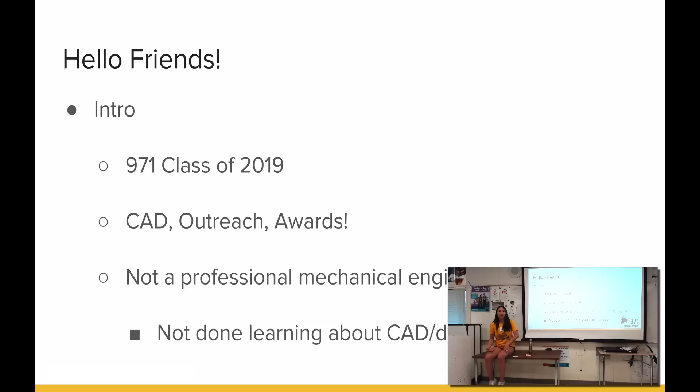I'm also never done learning about CAD and design. It's such a wide field. There's so many more things to learn about it. The software has so many things. The design, just learning design, there's so many new things you can learn. So just take me, yeah.

Okay, so the first thing we're going to talk about is what the difference is between CAD and design. I know a lot of teams kind of group those into the same thing. Your CAD lead is the same as your design lead, but they're actually quite different. So CAD is a software. What we use on our team is SolidWorks. Some of you probably use different things, like Inventor, Fusion. For today's presentation, it doesn't really matter what you use. The principle behind it is all the same.

But CAD is a tool, so it's something that you use to accomplish something, right? But when you're designing something, you're creating something for a specific purpose. You have something that you want to accomplish, and you're trying to do it. So you're building an arm to put something on the scale. You're building intakes to be able to intake a cube at X position, right? And often when you're designing, you use physics and mathematics to optimize functionality. You want to know how something is going to work when it's actually on the field.

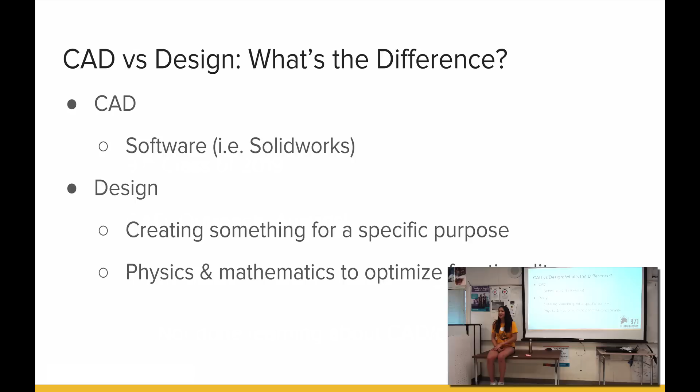So today we're going to be talking about how we use CAD software to optimize design. So how do we use the CAD software as we go through the build season to be able to optimize and increase functionality, to predict what's going to happen when we actually design a mechanism and then put it out into the field. So any questions about that?

Oh, just because I'm curious, how many of you guys use SolidWorks? Okay, that's like most. Any Inventor or Fusion? Okay, that's totally fine. You'll still understand.

Okay, so what happens on day one of build season? So you get the game. You're probably very excited. Sometimes you're probably a little scared. But what we do is we start brainstorming potential strategies. So what do we want to be able to do? Do we want to be able to place on the scale? Do we want to be able to place on the switch? What kind of mechanisms do we want to build that will accomplish them?

So we'll always come up with some goals. To maximize the amount of points that we can accomplish, what kind of strategies do we want to deploy? Like, do we want to be running defense? Do we want to be doing vault, switch, to scale? And then how are we going to build mechanisms to accomplish those goals? So are we going to build an elevator? Are we going to build a double-jointed arm? What's going to happen, right?

So then we want to know if something will work. Because you can say, oh, I'm going to build a 10-jointed arm that's in the game animation, but you don't really know if that's going to work. So the first thing you want to think about is what your design constraints are. So what are the game constraints? How big can your robot be? How tall can it be? So how are you constrained there?

And then the second one is, how is your team constrained? So what kind of resources do you have? How many people do you have working on CAD? How much experience, and how much do you know? What is your manpower, essentially?

So a good example I always make here is we build an off-season robot called the third robot, and it's always very different from the season robot because our off-season robot doesn't have any mentor involvement. It's completely student-run. So the resources and the team constraints for the third robot are very different from what we can allow for ourselves during the season, if that makes sense.

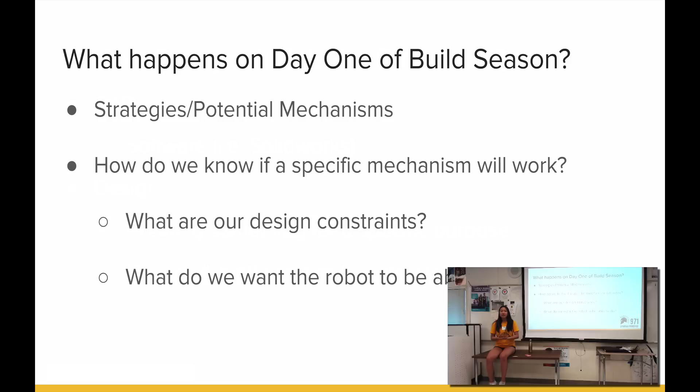And then you also want to think about, back to your original strategies, what do you want your robot to be able to do? So you have strategies. Maybe you want to be able to place on the switch and do the vault, or maybe you want to be able to do the scale and defense. So what kind of mechanisms are you going to be building? And are those going to work to accomplish that goal that you set for yourself?

Okay. So in order to accomplish those goals, you want to ask yourself some specific questions. So you probably accomplish this doing either prototyping or doing some CAD modeling, and I'll talk about those a little bit later. But you want to ask specific questions. You want to know exactly how you're going to solve your problem. You're not just prototyping just because. You're also not going to prototype your whole robot. You're prototyping specific aspects of your robot to be able to solve specific questions.

So what I have here is, how tall does the arm need to be to stack two high on a losing scale? That's a very specific question. You have a goal. You want to stack two high on a losing scale. Okay, so how are you going to do that? Where are you going to put your wheels on your intake so the cube doesn't get stuck?

So if you attended our overview, you would know that one of our main goals was to be able to intake the cube in whatever position. So how are we going to build a mechanism that accomplishes that? And then what kind of material would grab the cube well? So we were testing a bunch of different materials to grab the cube. So how are we going to do that too?

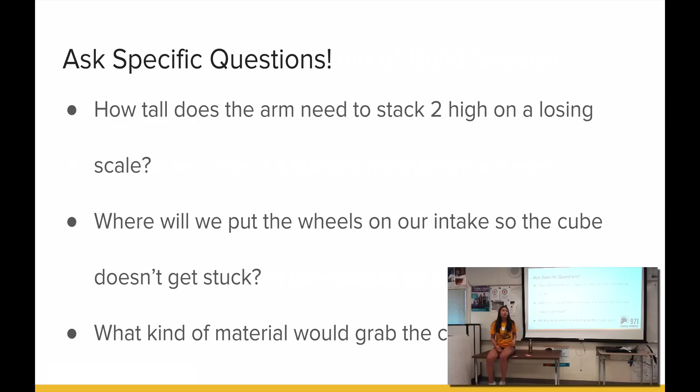Okay, so then how are we going to answer these questions, right? You have questions. You don't know how you're going to build an arm. You don't know how tall it's going to be. You don't know what your intake's going to look like, right? So now you want to start solving these questions. So there's two different ways that you can start. Week 1 of build season, you have to go really broad. You don't really know what your robot's going to look like. You kind of know what you want.

So then prototyping is more like real life situations. There's things that happen on the field that you can't really account for in CAD. So like the carpet, that one's always a big one. You can't model a carpet in CAD. You can't model the friction that the cube has across the carpet. So you always want to be prototyping something that allows you to address those issues. So this is kind of like what happens in real life.

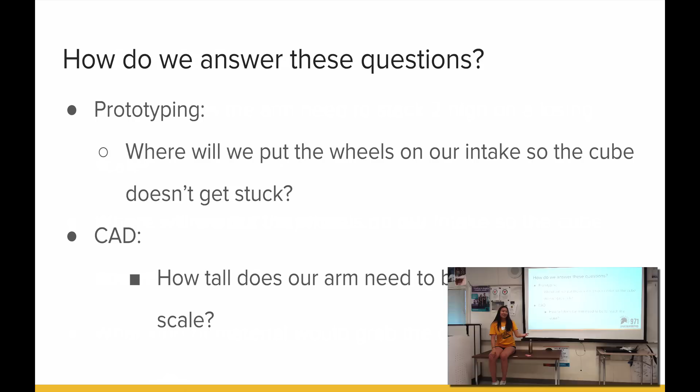You're trying to simulate what's going to happen on the field, but then you also have questions that you can answer in CAD. So, for example, how tall does our arm need to be? You don't need to build an arm prototype to answer that question. You can model that in, and then model the different segments. And I'll talk a little bit more about how we do this next.

Okay, so to answer those questions that we can solve in CAD, we do something called Crayola CAD. It's called Crayola CAD because you can liken it to drawing with crayons. When you're drawing with crayons, it's not exactly the most specific thing. You don't exactly know how big that part is going to be, but you can approximate. And you only have what you care about.

So it's big blocks, it's sketches and representations, and like I said, you're trying to solve a specific question. You're trying to find an answer to something. So this would be how long is my arm going to be? So maybe you have one segment for the distal, one length of the arm, and then you have another segment for another length of the arm, and okay, is that tall enough, right?

You are trying to understand the pros and cons of different designs. So is this feasible? Is this going to be possible? Can we do it with the resources that we have? How is this mechanism going to interact with the rest of the robot?

So where are my intakes going to go? Where are my arms going to go? Is it all going to fit together? Am I going to be able to package this right? And then you also want to think about what necessary components will I need. So then, am I going to be able to accomplish this with the components that are available to me?

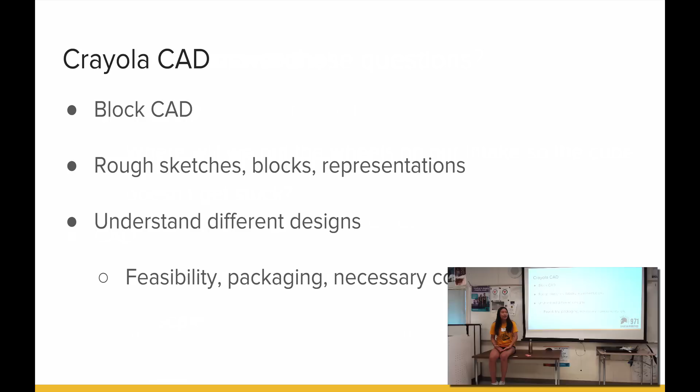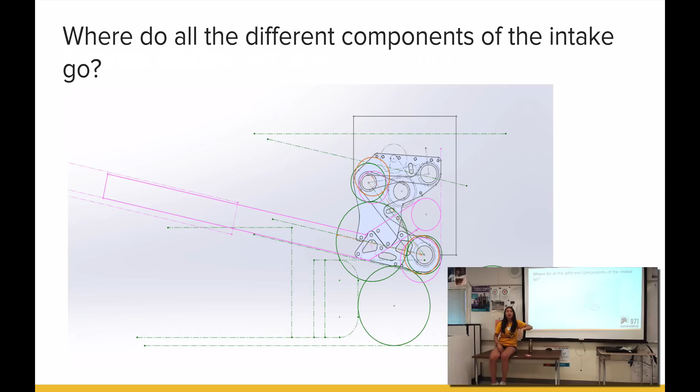So the pink line right here, that's the actual intake. So that's the part that comes out. And then the green ones, those are the balls. So it models the path of the balls as it flows into the robot. And then up there you can see all the belts and the pulleys that we had to model in because we wanted to know if it would fit together, if everything was going to work.

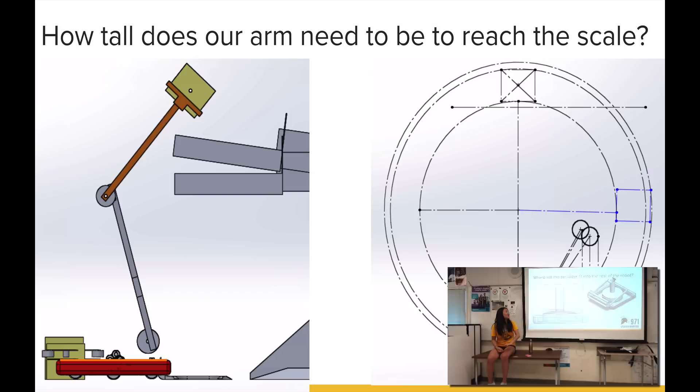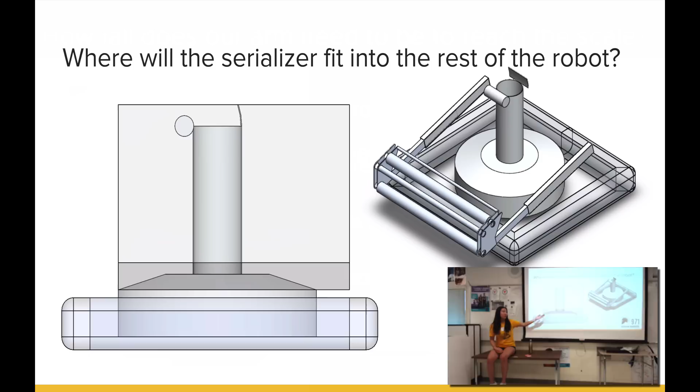Okay, great. So maybe by now you're in week 1, week 2 of build season. You know kind of what mechanisms you want. You know how they kind of fit in with the whole robot. You kind of have their basic constraints in. So okay, what's next, right?

You go back. Questions? And I'm going to go into more specific examples later.

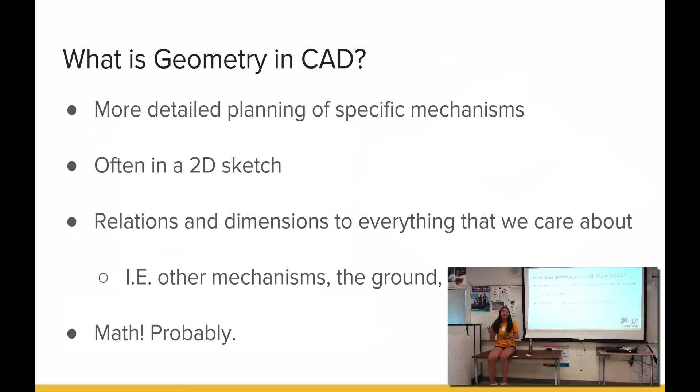And then with Crayola CAD, you say, oh, if we stick the serializer in the middle of the robot, where is all our other stuff going to go? Like, if we put a transmission right there, is it going to fit? Is the serializer going to run into it? Is that going to work? And then with geometry, you're solving the more specific hows of a mechanism. You're solving if it's going to, well, let's go to the next.

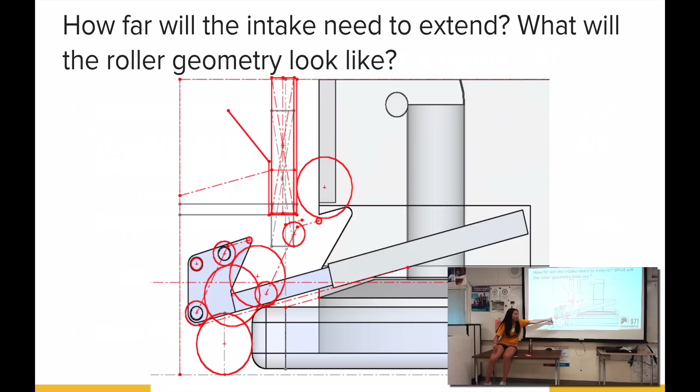So with gears, do you know how to calculate gear diameters? There's tables, and that's always what I've used. Okay, well there's actually a way that you can do it. Most of the gears that you buy on VexPro have 20 DP. DP stands for diametral pitch. So for every 20 teeth on a gear, you have 1 inch diameter. And then on a gear, you have something called pitch diameter, outer diameter, and inner diameter.

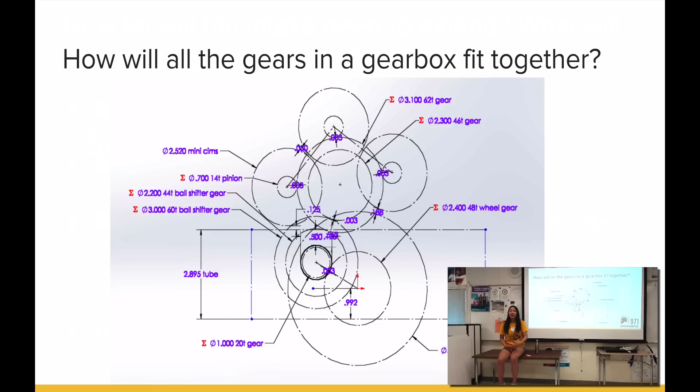It also prevents you from making errors, because if you say, oh, I want this gear to be 60-tooth, but then you actually model it in as 58, which I've actually done before, when you try to put the 60-tooth gear in, it's not going to fit. So this simplifies the process, because SolidWorks is doing the math for you, and you're not making errors in your design through math. Does that answer your question?

Yeah, okay, cool. So I've been going from less specific to more specific examples. This is the latch that was on our lift in 2018. Our lift flipped out, and there was a latch holding it down for most of the match until it flipped out. When I was designing this, I think it was week 6 of build season, and we basically already had a robot. We already had a drive base. I knew exactly where it was going to go. I knew where the latch was going to fit onto.

So I have these constraints, and they're very specific constraints. You can't change how tall your drive base is. You can't really change where the lift is folding down. So I'm going to take those constraints and do something with that, right?

So when I was doing this, there was a piston. This is piston geometry. So the latch, basically, the piston has something called a stroke length. So a piston is pneumatics, and you're filling it with air. And then it's moving between 2 different positions. It has an arm that's moving between 2 different positions, so it's going from this position to this position. And it's a linear motion, right? So I'm modeling that in because that's what I care about.

You can't change what your piston is. You can change what kind of piston you have, and you can change which piston you have, but once you picked a piston, you can't really change it. So that's what I care about, right? I know where my drive base is. I can't change that either. And I know where the latch is coming down. I can't change that either. So I'm taking those constraints, and I'm doing geometry to make sure that this is going to work, right?

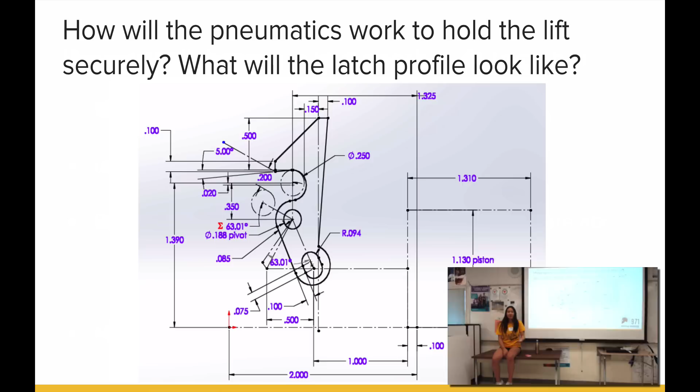And then later in the season, when we actually changed our lift, I was able to go back into this and just change how high it was. And then I didn't have to do anything else. And then it automatically saved everything for me, because this is like the overlying sketch that holds everything that I care about. So then if I just change how tall it is, then it's going to change everything in reference to what I care about. Any questions? Okay, cool.

Okay, so then when you're making parts, there's something called multi-body parts that we use. A lot of people have mixed opinions about multi-body parts, but I'm just going to talk about them, and then later I'll tell you what our challenges are with them. So for those of you who don't know, it's one single part. You're making one single part in whatever CAD software that you use. It doesn't matter. And then whatever extrudes on top, you have something called bodies.

So if you're making something like, I don't know, a gearbox, you're going to extrude your bottom plate, and then on top of that, you're going to extrude a circle. That's going to be one gear, right? And then you're going to extrude another circle, and that's going to be another gear. And each item is called a separate body. And then you have multiple bodies to make up your multi-body part. Does that make sense? The biggest benefit of using multi-body parts is that there's no arbitrary dimensions. You have what you care about, and then everything is referenced on each other.

So if you guys have ever made complex assemblies, you know you're flipping back and forth between all the different parts, changing the dimensions, and then you have a lot of copy pasting going on. Sometimes you copy paste wrong, and that's always a sad day. So this prevents that from happening because it's all one part, so everything references off each other, right?

The biggest thing that we use it for is custom gearboxes, because you have one plate that's basically your underlying sketch. Everything references that one plate. And then you're able to extrude your gears on top of that, your circles that act as your gears, and then you're able to extrude your plates, and maybe if you have encoders, you put your encoders in there, and you see it all as one part. And then you say, oh, wait, I want this encoder to be 1 inch higher. So then you go back into your underlying sketch, and you change that 1 inch, so that it changes everything. It's very nice.

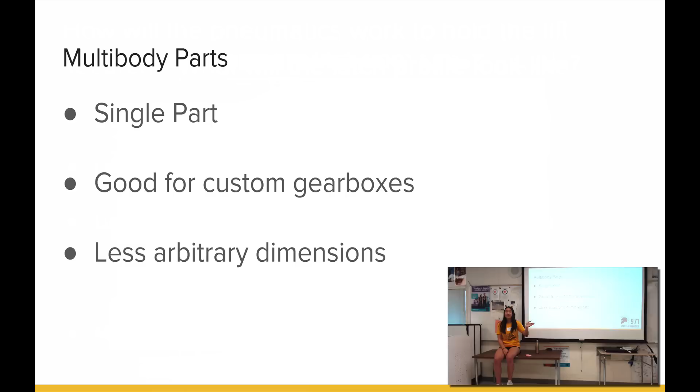And then there's no flipping back and forth between parts. You forget to put them in some parts, and then they're in other parts, and maybe you copy paste wrong. It's just always a mess. So it always helps us to use them for custom gearboxes. But then there's also a trade-off, and I'll tell you guys about that later. I'm going to give an example.

So then in the Arm Gearbox, there's one underlying sketch. And this is the sketch that shows where all our arms are going to go. We kind of know what our drive base looks like already. So how are we going to get around that? Because it kind of sits in the very back. There's wheels there. There's transmissions there. We don't want to run into any of that because that'd be a sad day, right?

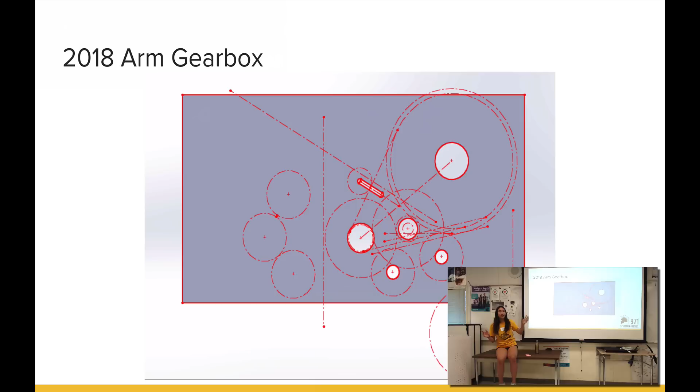So then from there, we were like, okay, let's put the next one. Let's put a hanger gearbox in it. We don't really have that much room. So how are we going to do this, right? So the original underlying sketch isn't going to change unless you want it to. So then based on that, you can optimize the space that you have down here, dimensioning off of the components that you had in the previous sketch. So your motor is going to be there. I don't want this motor to run into that, so I'm going to make them 0.2 inches away, right? You know where your wheel is, so you don't want your motors down here to run into your wheel.

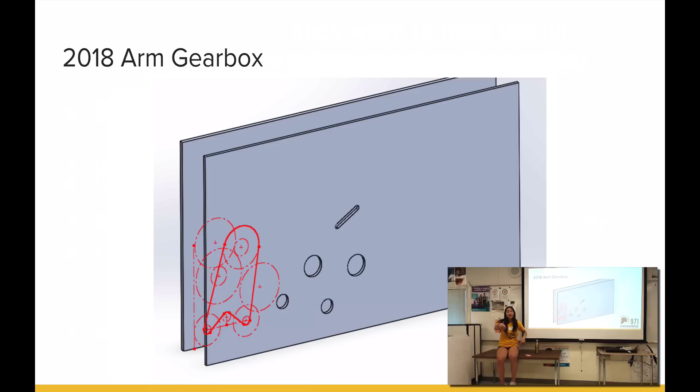And then if you go to the next one, I'll actually explain why we use multi-body parts. So it's a very big part. There's a lot of things going on. So why did we do this, right? As I mentioned before, we stuck the hanger gearbox into the arm about halfway through. We didn't really anticipate it to originally be on the arm, in the Arm Gearbox. So then we were thinking, okay, how are we going to fit this in, right? So there's two ways we could have gone around this. You could do a hanger gearbox that's made out of only gears, and then this would be from gear to gear to gear, right?

So then you can see here we modeled that in. Obviously, it doesn't really fit because this is running into that, and we don't want our hanger gearbox to be running into our proximal sprocket, right? And then the motors down here are running into the wheels. So then we said, okay, this isn't going to work, right? So then let's try again.

Let's extrude another sketch right on top of this so we can compare the two really easily. So if you go to the next one. Here's the one that we have with gears and belts. So right here, you have your motors down here, and then you're able to go there with the belt, and then you come back down. So that makes your packaging a lot easier if you have belts.

And then we said, okay, that's going to fit. It's going to work. And then we compared this to the previous one, and having two sketches that were right next to each other meant that we didn't need to flip back and forth. And since the underlying sketch, the sketch for the main gearbox with the proximal and the distal link, they were all the same, right? So we didn't need to copy paste it, because you can copy paste sketches, but it doesn't automatically update. So often we were saying, okay, we want this motor, the proximal motor, to be maybe just a smidge over. So then we could just go back into the original sketch and change that.

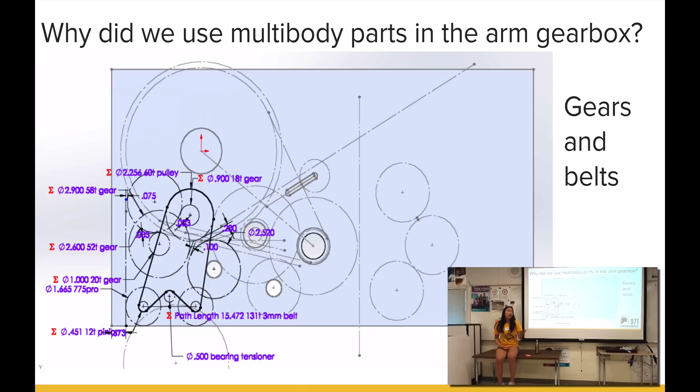And that's the main reason why we use multi-body parts in the Arm Gearbox, because it was so easy to iterate upon, especially when you're doing tough packaging jobs like this, right? You have your main dimensions that you really care about, so how are you going to optimize everything else to fit with those constraints that you set for yourself originally?

So now I'm going to talk about the challenges that we face. The big thing about multi-body parts is that there's less arbitrary dimensions, and the turnaround time is really fast, right? You change one dimension and it changes the whole thing, instead of going through multiple parts and changing them all. But at the same time, although it would have been nice, you don't want to model your whole robot in a multi-body part, because you could, but you shouldn't, because the bigger parts get, the longer they take to load.

So if you end up breaking something really early up on your feature tree, you guys all know what that is? Yeah, I'm just going to go over it. Can you go back to the slide? So this is called your feature tree. It's kind of like a, I don't know, it's a tree. It basically goes chronologically. So these are the first parts that you make, and then as you go down, each feature references features that are above it, but not below it. So if you break something really early up on your feature tree, you can break everything else. And you can imagine in parts that are this big, it gets really annoying if you break maybe the top level sketch and then everything else breaks.

So if you're making a whole robot out of a multi-body part, can you go back to that slide? If you make your whole robot out of a multi-body part and you break your first sketch, you might have to go through and redo a lot of your parts. And they can take forever to load, so I'll give a couple examples later, but you have to know when to use them and when not to use them. And I think I'm still learning this, I think our team is still learning this, because there's ways that you can use it to your benefit, and there's also ways that you can use them to your disadvantage.

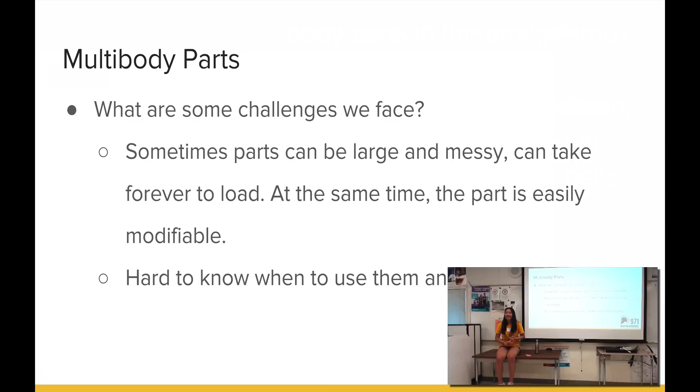Okay, cool. So I'm going to talk briefly about the parts management and the parts library, because accessibility is in the title of the presentation. So we have a parts library that is available to every single student who's doing CAD. And COTS parts stands for commercial off-the-shelf parts. These are parts that you can buy on McMaster, on VexPro, on WCP.

And it's really annoying to have to go download the part and bring that into the folder every single time you're making, say, a gearbox or maybe an arm. Downloading all the parts individually and pulling them into the folder is really annoying. And also, if everybody's parts are in different folders, when you try to open someone else's, if their gears are in their downloads folder, SolidWorks isn't going to find those same gears in your downloads folder, so you're going to have a problem, right?

So what we do is we have a folder called the parts library, and that shows all the common parts that you can buy from McMaster, from VexPro. So this would be like bearings, gears, sprockets, motors, and this keeps everyone's COTS parts in the same place, so that if you open someone else's gearbox, it's not going to break everything because their gears are in their downloads folder or something, right?

So then, probably the more important aspect of accessibility is the parts list. 971 has a parts list that we update with every single part that we make in CAD. So that spacer has a part number. The arm gearbox plates have a part number. So basically, each part has a part number, and you track that part throughout the entire process. When it's being CAD'ed, you know it's being CAD'ed. And when it moves to drawings, and CAM and routering, and when it's kitted and put into the robot, you know where that part is.

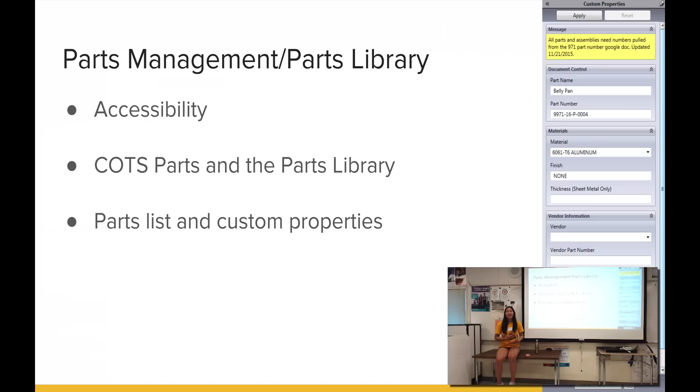Okay, next. So probably the most important part is iteration, right? You can make mechanisms, but they might not always work the first time. So you want to be able to use SolidWorks or whatever CAD software you use to optimize your design so you can iterate and go back and change things, right? I talked a little bit about this with geometry, with multibody parts, but there's an underlying principle: everything needs to have a reason. You're not making a feature because you want to. You're making a feature because it's going to help your design.

A fun story about this is when I first started doing CAD, I used to fill in my holes with boss extrudes because I didn't want to go back and delete the hole. And then when you go back and try to change the underlying sketch, it's going to break everything, and you basically have to start over. So you want to make features because they're going to help your design, not just because they're convenient for you at the time, right?

So a good way that you can accomplish this, I talked a little bit about this before, is to do a top-level sketch. This is a sketch that has everything you care about, so all your constraints, all your motors, all your components, whatever is in your part, right? And then you want to dimension not arbitrarily, but what you care about. So you're not making this dimension 1.5736 inches just because.

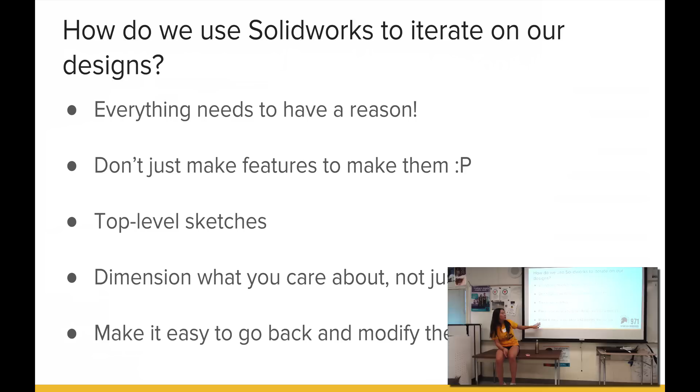You're making it because it has a reason, and round numbers are always better. But the big thing is that you want to make it easy for you to go back and modify the design. And I'll go through a couple examples.

Okay, so here's a simple example, right? This is a shaft. They're not really the same shaft, but you kind of get the point across. This one here is an underlying sketch, so it has everything that you want, right? You know you want a snap ring, so you dimension that in here. This is a shifter shaft, so you know you want your gears to fit in right there, so you're going to dimension that there. You know you want a bearing at the end, so you're going to put that in there too.

But then in the next one, which I actually just did, the way that I did it was I had a hex shaft and then I just extruded it and then I cut features out of it as to what I wanted to. And yeah, maybe it was more convenient. It probably took me less time than this one did. But then what if I want to change how wide my gearbox is? Then I have to go through and I have to modify every single part right there.

And then also, what if the gearbox plates happen to be a really arbitrary number apart? Then you have to copy paste that number into every single feature that you have. And that's just really annoying. Maybe you're really good at copy pasting, but I think I would copy paste wrong. So you want to prevent that from happening, because then you'd end up with parts that don't align, and sometimes you don't catch that in CAD because everything is so dense.

So then when you're manufacturing stuff and you're trying to put this together, you're like, oh, this shaft doesn't fit between these two gearboxes because I didn't make a top-level sketch that dimensioned everything. But then in this one, if you want to change how wide your gearbox is, you change one number, and everything changes to match that.

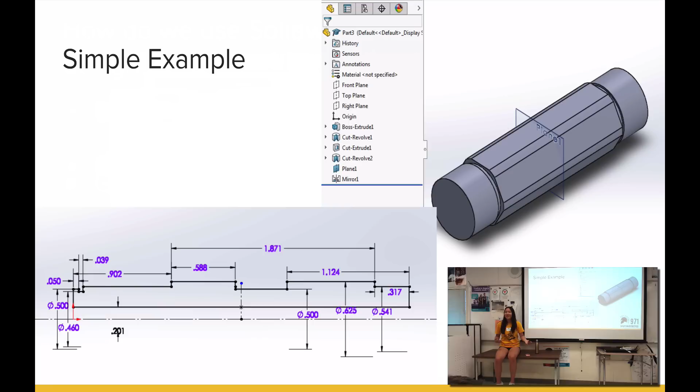And that's a lot more convenient for you, because obviously that's not a really complicated shaft, but if you have a shaft that is more complex, then it would be really annoying to have to go back and remanufacture that and redesign that if you happen to not have done it correctly. So, yeah.

Okay, so here's a less simple example. This is a 2017 turret. Our 2017 robot had a shooter that rotated. So when we were doing this, we knew basically how wide our shooter was. So from there we said, okay, I know how big my shooter is, so how am I supposed to get dimensions, and how am I supposed to do everything so that it fits with the rest of the robot, right? So then you know you want a motor, you know you want to drive the shooter in some way, the turret in some way.

So then you make an underlying sketch with everything that you care about. You care about where the gearbox is relatively. You care that it's not running into the shooter, so you put that in, and then you care about where it's being driven. And this is your underlying sketch.

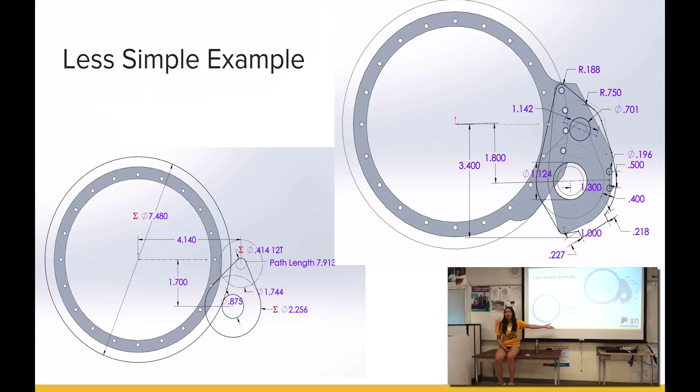From this, you're able to go in there and extrude your features, right? You're able to extrude your gearbox plates, you're able to put in your standoffs, you're able to put in your encoders based on what you have in here. Because this is what you care about, this is what you don't want to change, or this is what you want to be the most important part of your design. Any questions? Okay.

So, okay, I'm going to say something cheesy about iteration. All 971 mechanisms go through iteration. I know a lot of our designs look clean. They look kind of, I don't know, I think the arm is kind of flashy.

But when you're designing something, there's always ways to approximate. You can prototype, you can do math, you can do physics, but you never really know exactly how a mechanism will work in real life, right? So iterating on mistakes is always the best way to learn. There's a couple examples I can give.

In 2017, I think we cut our intakes like 5 different times. And it made it really easy for us because we had that underlying sketch. So every time we wanted to change something, we changed a couple dimensions and we just cut it again. But every single time we were iterating upon it, we were learning something. And then if we made a mistake, we knew we weren't going to make the mistake in the next iteration.

It's really impossible to build something and then put it out on the field and it's not going to have mistakes, right? There's ways you can approximate how a mechanism will work in real life. You can do prototyping, there's math, there's gears, there's geometry, but you always want to be able to go back, you want to be able to iterate on your mistakes, and you want to be able to learn from them

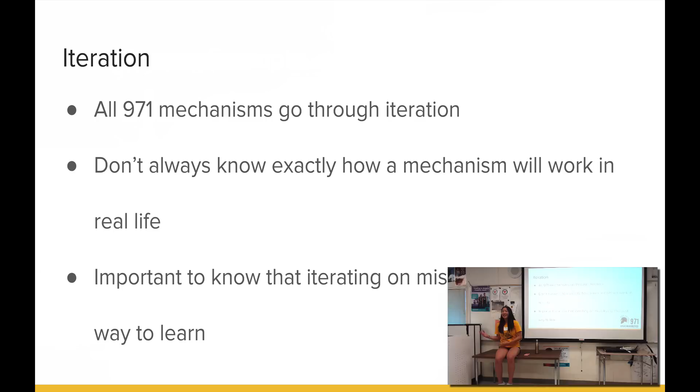next time, because that's always the most important part of design, in my opinion, is learning, because then you're not going to go back and you're not going to make that same mistake, and next time your mechanism is going to be better. So, that's all.

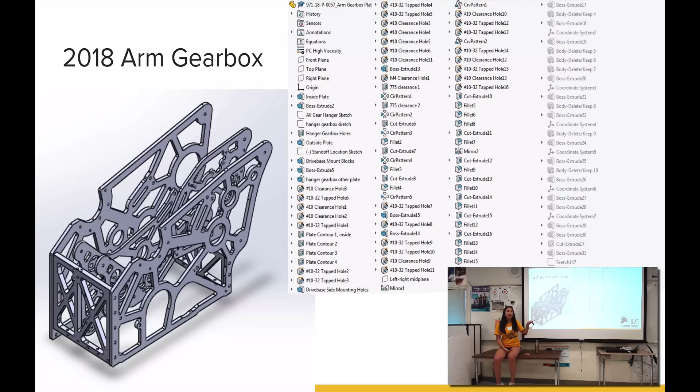So then what we do is we make derived configurations out of this. This is the default part, right? Solidworks actually has a functionality that allows you to delete/keep. So you click on a body and you press keep, and it inserts that into a separate derived configuration. So then when we're manufacturing, each part has its own configuration, and that allows us to manufacture upon it. That was a really good question. I didn't cover that.